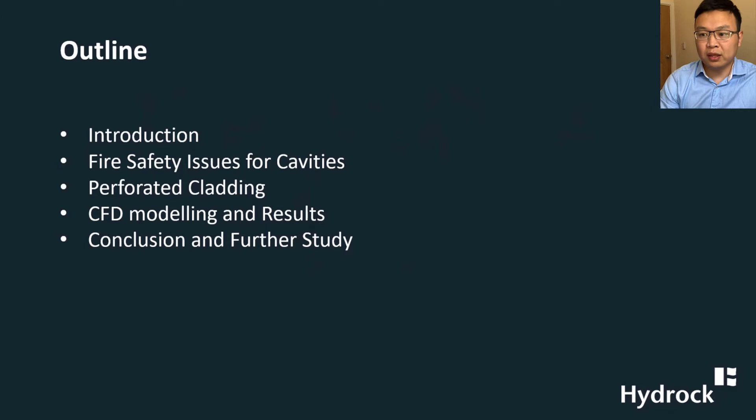It's my pleasure to present at this technical conference. The topic of my presentation is CFD investigation of fire-driven airflow within cavities behind the perforated cladding system. The outline will include an introduction to the topic, discussing fire safety issues within the cavity space within external wall construction. I'll also talk about the application and benefits of perforated cladding systems, then present the CFD analysis and results we have to date for the investigation, followed by conclusions and further studies.

The Grenfell Tower tragedy has highlighted the severity of fire spreading over cladding. It is considered a significant life safety risk, especially for high-rise residential buildings, and highlights the importance of fire safety design of cladding systems to prevent fire spreading on and within the external wall. The tragedy has led to new regulatory change in the UK to restrict the use of combustible materials in high-rise buildings within the external wall, and also the provision of adequate cavity barriers within the wall.

The Dame Judith Hackitt report also highlighted steps to further enhance fire safety to buildings, and the importance of risk and outcome-based fire safety design. Therefore, a better understanding of the performance of systems in fire is essential for a robust fire safety design.

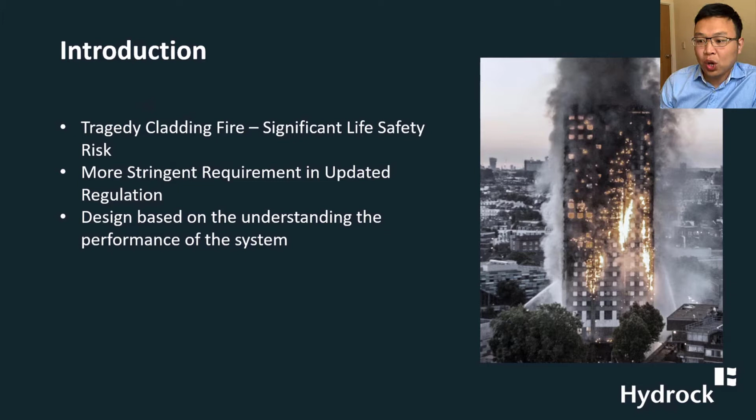The study presented in this presentation aims to understand the fire-driven flow within a cavity created by a decorative perforated cladding system. As you know, once a flame begins to impinge upon the external fabric of a building from either an internal or external fire source, there is potential for the external cladding system to become involved in fire and contribute to external fire spreading of the building by one or a few of the following routes.

The surface propagation influences the rate of fire spreading of the building envelope via the surface of the external cladding system. Combustible materials such as insulation materials will, without doubt, provide a bypass for fire spread and accelerate the fire spread rate. It could also spread across the building via attachments to the external wall, such as combustible balconies.

The other very important part is the cavity. Cavities are common in external walls for different purposes - they enable drainage and ventilation, and limit the internal passage of moisture. However, extensive cavities have the potential to spread smoke and flame in an unseen manner from one compartment to another. If the flame becomes confined by entering the cavity within the external cladding system, it will become elongated as it seeks oxygen and fuel to support the combustion process.

This is known as the chimney effect, which can lead to fire extension many times longer than the original fire length. This effect, even within a cavity that is fully non-combustible, could allow the flame to reach the next floor level, where windows or other wall penetrations allow the fire to re-enter the building. This causes fire spreading from one level to another, breaching the compartmentation.

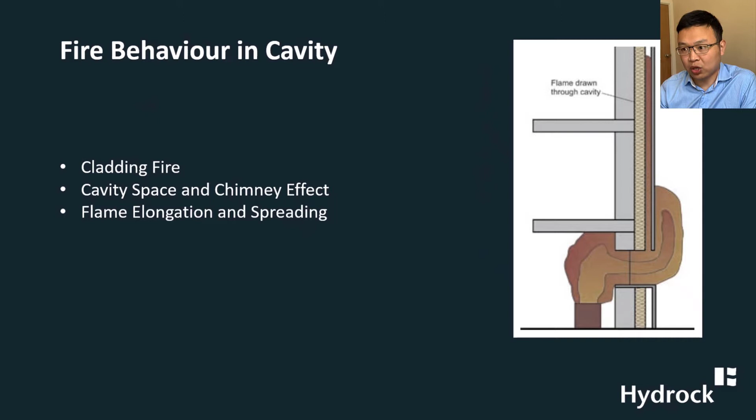Perforated metal cladding is increasingly applied in different types of buildings, as it provides a very effective way to enliven the facade of an otherwise simple structure or building. The perforated cladding has the ability to add depth, texture, or features to the facade, since the form of the perforation is variable and attractive.

It can also control and manage the amount of natural light reaching the inside of the building, depending on the size of the perforation, while reducing the amount of solar gain, especially for buildings with large glazing elements. However, the perforated decorative cladding creates a cavity or gap between the metal cladding and the wall, which could provide a potential fire spreading path due to the narrowed space.

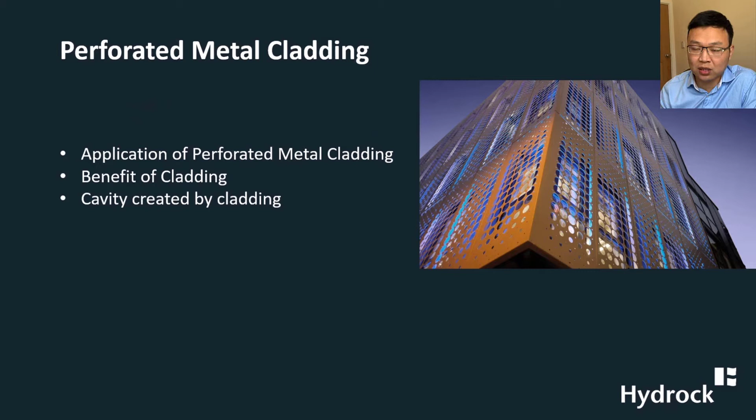But in the meantime, due to the perforation on the cladding, the air inflow differs from the cavity within a traditional ventilated cladding system, which may affect the fire dynamics within the space. This slide is a simplified way to demonstrate the key phenomena that happen in the cavity.

The fire behavior in a narrowed cavity scenario with no perforation is governed by the limited space under the chimney effects. The ignition and the efficiency of the combustion is controlled by the rate of air inflow and pyrolysis rate, if there's any combustible materials in the gap or the wall surface. The flame geometry and flame height are likely influenced by the cavity width. Heat transfer from flames, radiation effects from the cavity enclosure and the cladding will determine the heat rates and heat areas in the space as well.

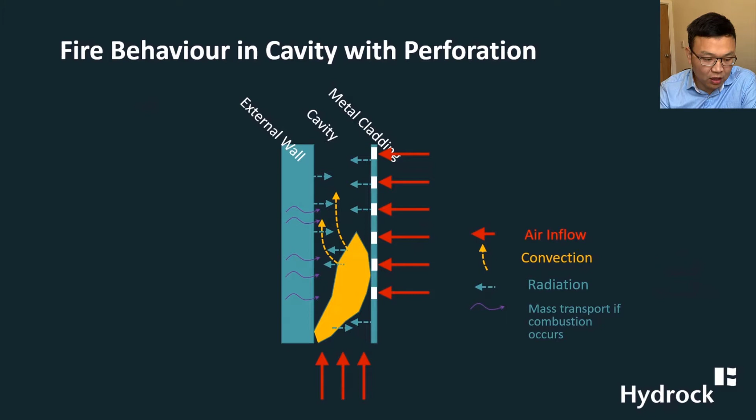However, with the introduction of perforation on the cladding enclosure, the air inflow rate will increase as the perforation rate increases, and the re-radiation from the cavity enclosure is also reduced due to area reduction of the cladding enclosure. The perforation also provides a way of heat dissipation to the outside of the cavity. However, very little study has been carried out on fire-driven flow within the cavity behind perforated metal cladding. Therefore, in this study we use CFD as a tool to study fire-driven flows and flame spread within that kind of cavity.

A series parameter study was carried out based on the CFD model. The model consists of a narrow and long gas burner, positioned between two parallel facing non-combustible surfaces, one representing the outer face of the wall construction and the other representing the metal decorative cladding. The dimension of the model is assumed to be 2 meters by 1 meter.

The burner is located next to the wall, and the outer face of the wall is assumed to be of brickwork construction, 120 millimeters thick, while the perforated cladding system is assumed to be of steel material, 10 millimeters thick. The temperatures, incident heat flux, and upward airflow velocity within the space are all measured.

The parameters investigated include the cavity depth, perforated ratio, and fire intensity. Three different cavity depths were studied: 40 millimeters, 80 millimeters, and 120 millimeters. The perforation ratio ranges from 0% to 50% for comparison purposes. A case with no metal cladding was also studied.

The fire intensity studied was 15 kilowatts per meter, 30 kilowatts per meter, and 150 kilowatts per meter, which are comparable with available test data from small-scale cladding fire tests in the literature, where heat flux ranges from 16 to 125 kilowatts per meter.

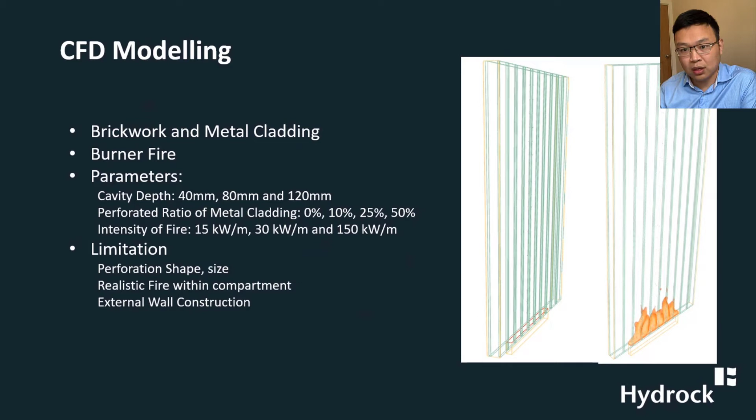As with every CFD analysis, the first step is to establish the suitable mesh size for the purpose of the study, considering the balance between the level of accuracy and computational costs. A sensitivity study was carried out to compare results obtained using different mesh sizes, such as 5 millimeter, 10 millimeter, and 20 millimeter.

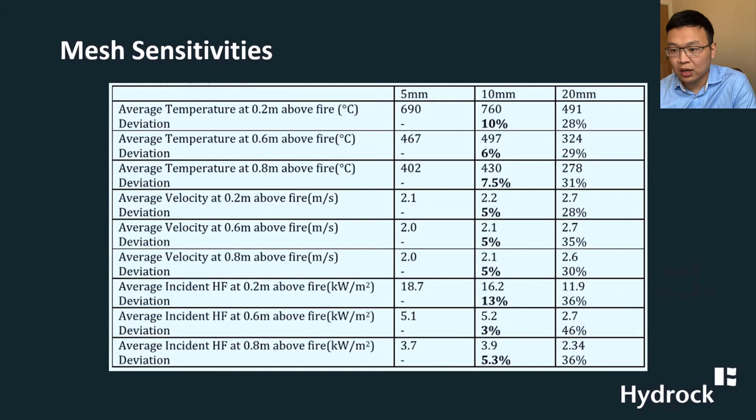The deviation of the result is presented in this table, which shows that the deviation between the 10 millimeter and 5 millimeter mesh sizes is largely less than 10%. Although it's not a perfect match, for the purpose of this study—preliminarily understanding the fundamental principles and parameters affecting fire-driven flow within the cavity through a comparative study—we consider that the 10 millimeter mesh size provides an acceptable level of accuracy and is fit for the purpose of this study.

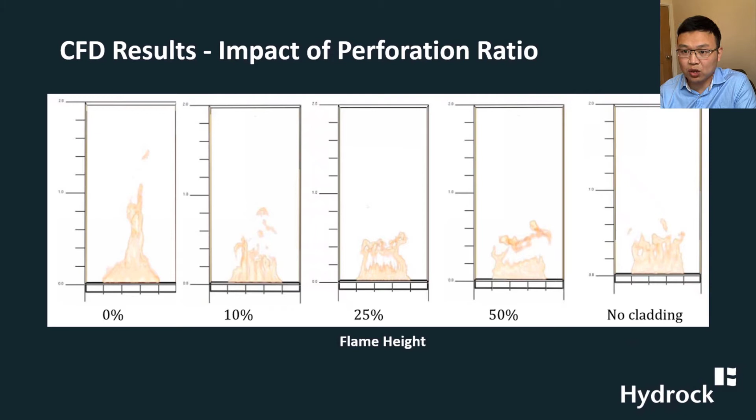However, when the perforation ratio is above a certain level, its impact on the flame height is reduced significantly. This slide shows the velocity contour at 20 seconds for the cases with different perforation ratio, where the fire is already in a steady state.

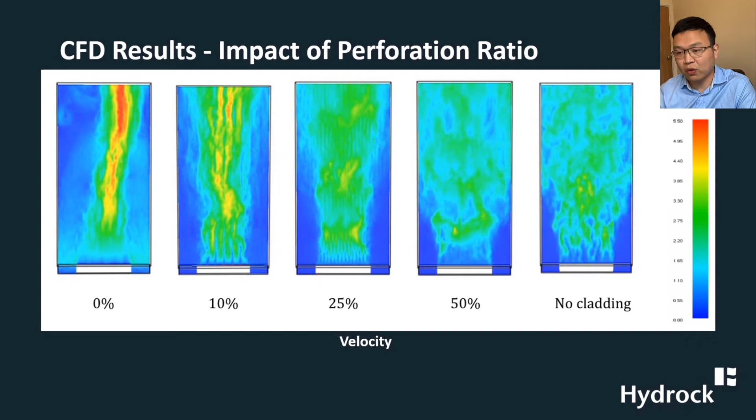It can be seen that the velocity of the airflow within the space is clearly reduced as the perforation ratio increases. With the perforation ratio more than 50%, the velocity of the air-driven flow within the cavity is very similar to the case with no cladding. So that means if the perforation ratio is over 50%, the impact of the cladding on the airflow velocity within the space is less significant.

This is likely due to the effects of re-radiation from the outer cladding panel with no perforation, as well as the increased temperature within the cavity where there's no perforation providing heat dissipation to the outside.

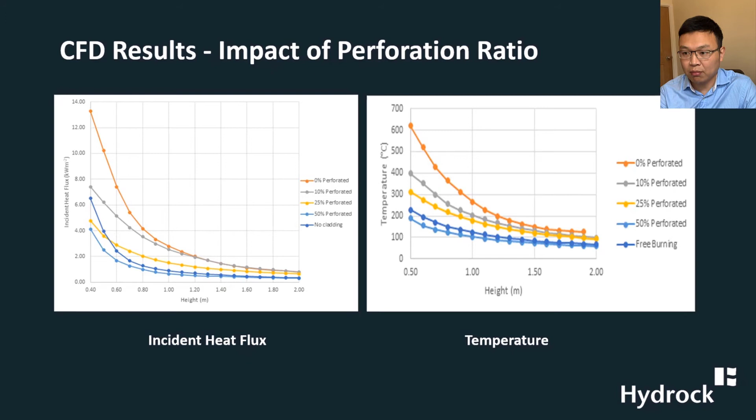However, within the cavity, when the perforation ratio is over 50%, the incident heat flux along the height is very similar to the case with no cladding. Again, this demonstrates that with perforation over 50%, the incident heat flux and temperature are not influenced that much by the provision of the cladding system.

This slide shows the impact of the cavity depth on the fire-driven flow velocity. The velocity is represented here by the isosurface of velocity 1.5 meters per second. There are two groups of figures shown, each having 120 millimeter and 80 millimeter cavity depths respectively.

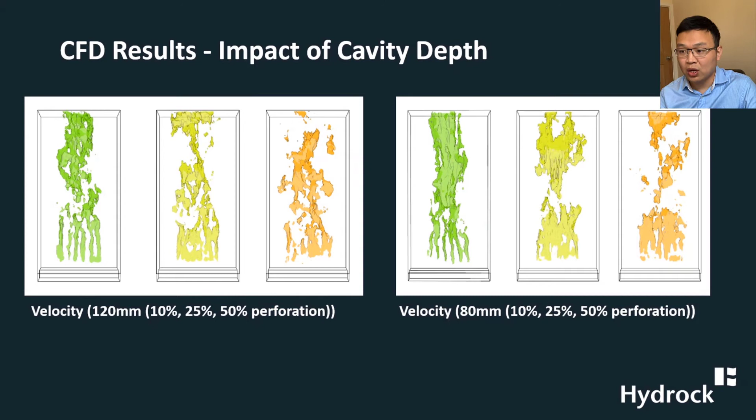Within each group, there are 3 perforation ratio cases presented. It can be seen that in general, the impact of the cavity depth on the velocity of the airflow is less significant than that of the perforation ratio. This is due to the perforation having more direct influence on the air inflow rate to support combustion within the cavity space.

This slide shows the incident heat flux of two perforated cases with different perforation ratios, i.e. 25% and 50%. Within each plot, the results are provided for different cavity depths. It can be seen that the incident heat flux along the height within the cavity does not vary too much if the perforation ratio is over 25% and the cavity depth is more than 80 millimeters.

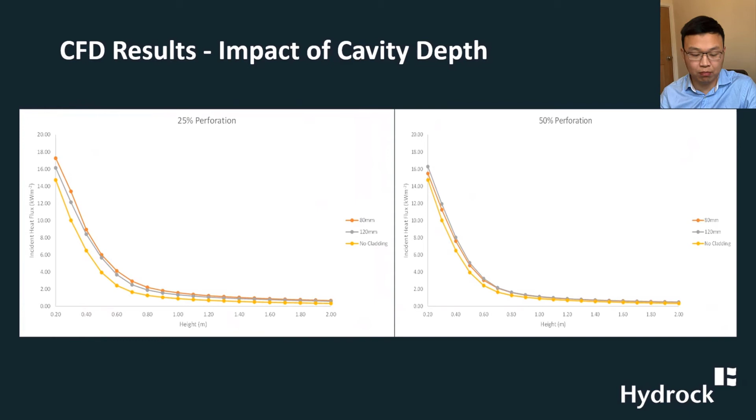This is the temperature of the airflow within the space represented by the isosurface of 200 degrees centigrade, showing the influence of the cavity depth on the temperature within the cavity. It can be seen again, as with the velocity slide, that the impact of the cavity depth is less significant than that of the perforation ratio, especially when the cavity depth is over 80 millimeters.

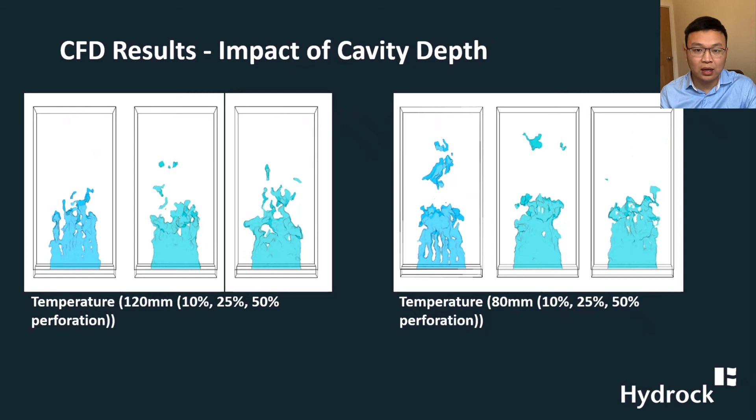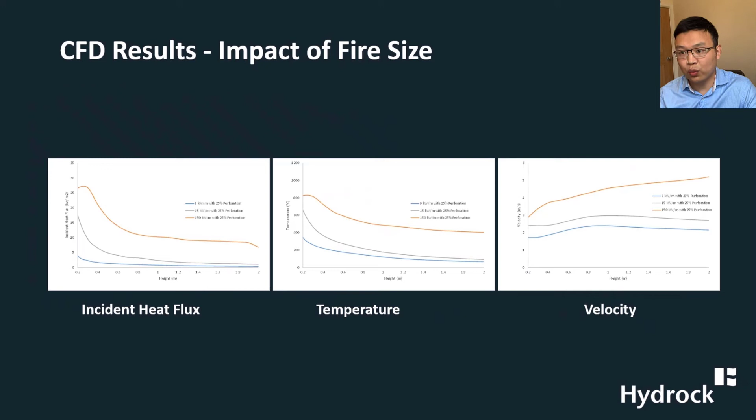This slide shows the impact of fire intensity on the fire-driven flow within the space. Clearly, the velocity, temperature, and incident heat flux all increase as the fire intensity increases in the space. But if we look at the case with the most severe fire intensity, we also look at the impact of the perforation ratio on the fire-driven flow pattern within the space.

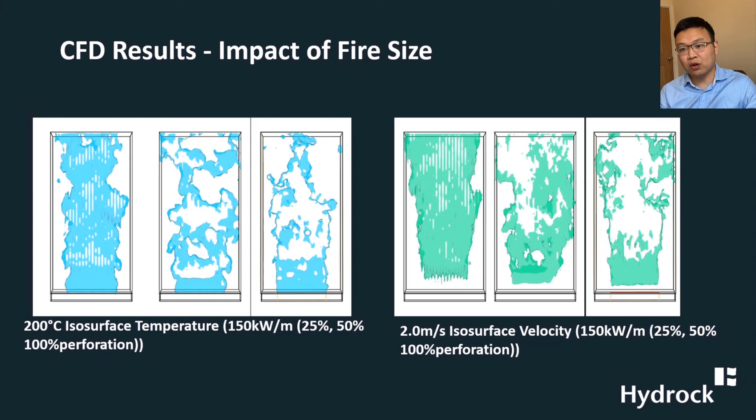That is presented here: the velocity and temperature plots are presented in these slides. It can be seen that when the perforation is over 50%, the fire-driven airflow within the gaps is similar to the case with no cladding, i.e. the influence of the perforation ratio on the fire dynamics within the space is significantly reduced when the perforation ratio is over 50%, even under the most severe fire that we studied.

This study presented here is a preliminary study on the influence of cladding perforation on the fire-driven airflow within the cavity. It's only aiming to understand the influence of key parameters on the airflow pattern within cavities, based on the assumed fire size and the cladding configuration.

We plan to investigate the performance of the cladding system further by carrying out CFD modelings with full cladding system under more realistic fire, for example post flashover. We also aim to study the cladding system with different perforation shapes, locations, and ratios as well.

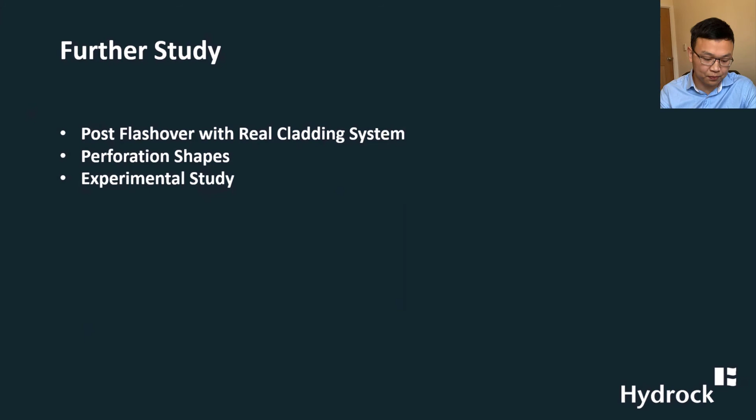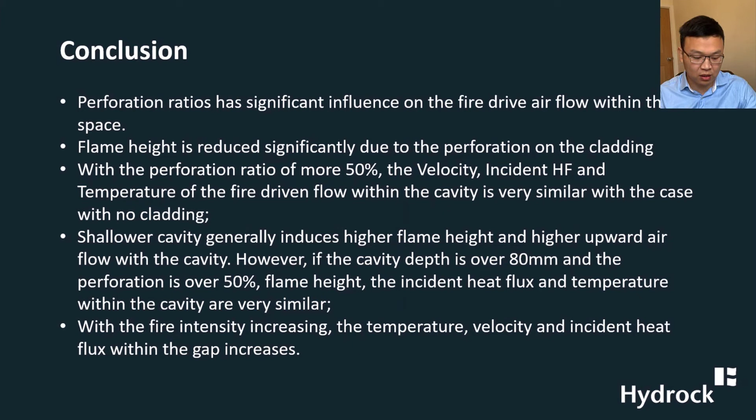With that, this is the conclusion of the study we have up to now, which I've basically talked through already. Due to the time limit, I'm going to stop here. Thank you for listening, and if you have any questions, feel free to ask. I appreciate any feedback. Thank you.

All right, here we go. So we'll just keep an eye out in the session chat for any questions coming in. Yeah, thank you very much for your talk. Appreciate it, it was nice.

Okay, so we have a question here: did you have a chance to validate the model with any experiments or literature data?

No, but that was the intention for the next step, because I know there are a bunch of available test data for the traditional ventilated cladding system. We wanted to do some verification, validation, and assessment against the experiment data. But I don't see any perforated cladding system that has been tested at the moment. So we probably just need to do a bit of validation and verification of the model based on some traditional ventilation system, and then tweak our model again to investigate the perforated cladding system.

Great. Hopefully there will be some universities or research programs doing the test data, because I'm working in consultancy and I don't think the company would pay for that anyway. So that's a shout out to anybody looking for their next thesis. But there are a couple of good universities we have a relation with, so probably worth a conversation with them as a next step.